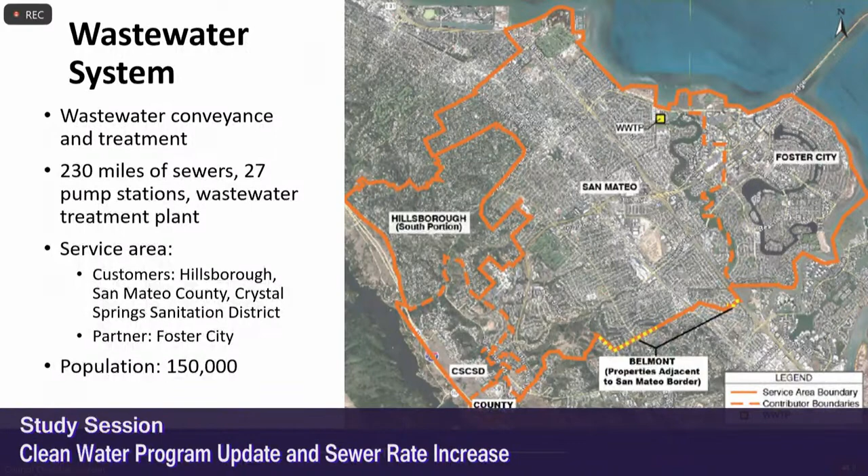As you can see from this figure, we have a pretty extensive wastewater conveyance and treatment system, over 230 miles, many pump stations, and a wastewater treatment plant in the city. Our service area includes customers such as sections of the town of Hillsborough, San Mateo County, and the Crystal Springs Sanitation District. We have a partner, Foster City, who owns a quarter of the treatment plant. All in all, our service area spans over 150,000 residents in the city and in the areas of our customers and partner.

The drivers of the Clean Water Program have been really regulatory. In 2009, we were served with a cease and desist order to address sanitary sewer system overflows. The goals of the program have therefore been to fix our aging infrastructure, add capacity so that we can manage wet weather flows, and meet future regulatory requirements, specifically those associated with nutrients.

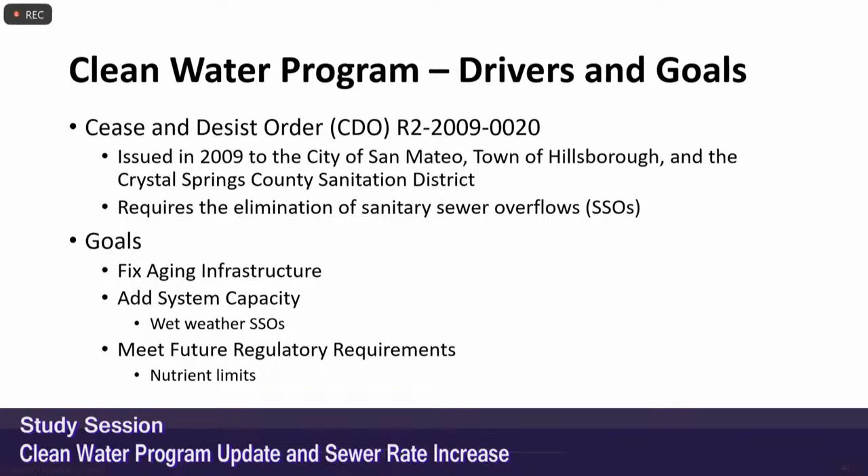This has been a $1 billion, 10-year effort. We're actually in year nine. As you can see from the figure, we have quite a few projects that have added 10 miles of sewers, and we have our expansion at the treatment plant. We anticipate completing the program in fiscal year 2025-26.

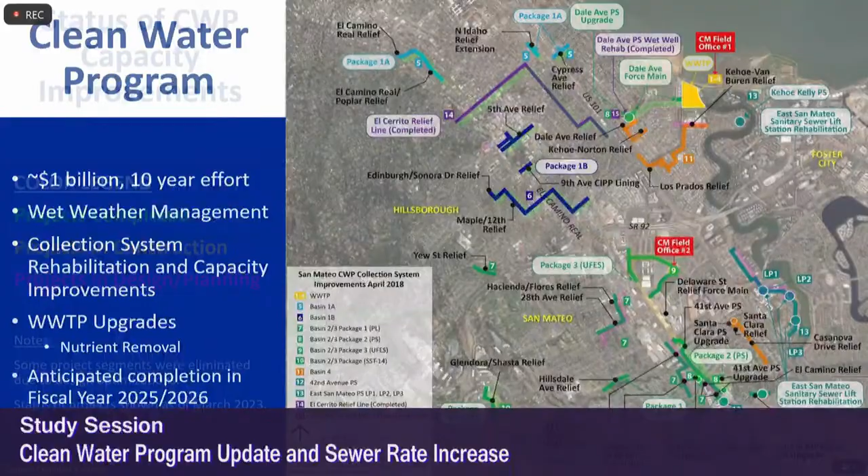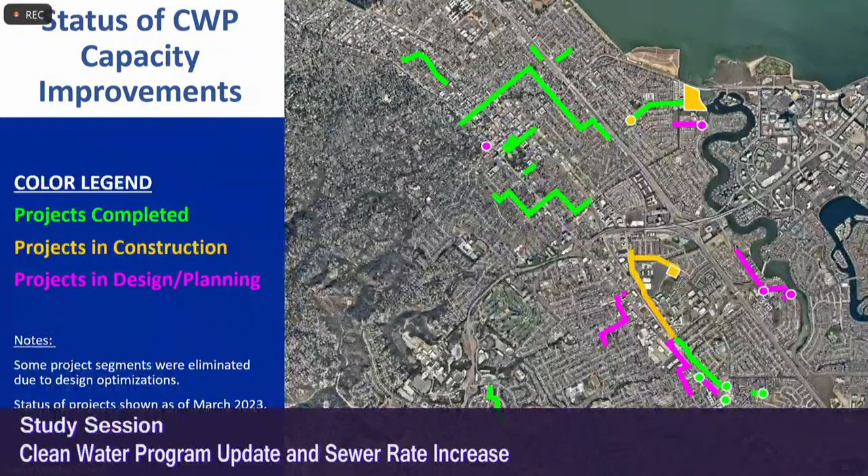Thus far, the projects in green are all those that we have completed. We're currently in construction on Delaware, at UFES, and the treatment plant, and we've got a few remaining projects in design and in the planning phase. We're almost there.

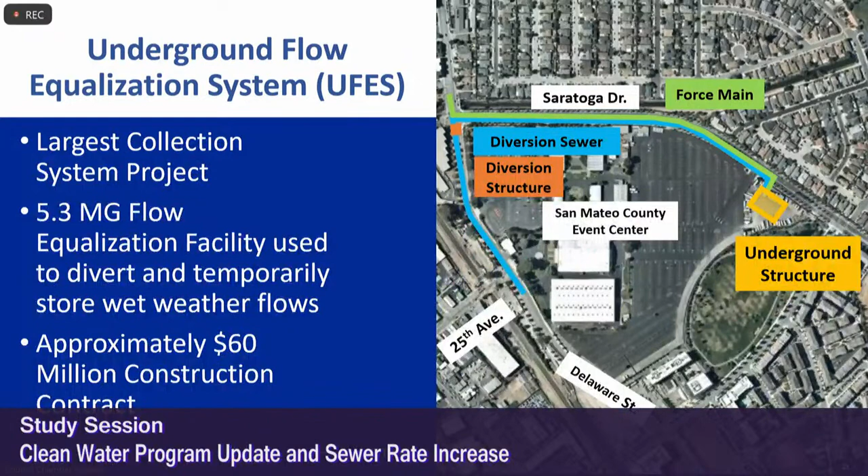Now, you've heard about our underground flow equalization system project. This is our largest project in the collection system. It consists of a 5.3 million gallon tank that will be used during wet weather, and it's cost us approximately $60 million.

We do have existing sanitary sewer overflows throughout the city. There's an area along Delaware where there are constraints and capacity challenges, so that's the area where we see them when it rains. So the location of UFES is pretty critical, and it's being built at the county event center.

The way the system will work is when it rains, our operators at the treatment plant will decide when to divert flows, store that flow, and then when the flows at the treatment plant get low enough, they'll start pumping that water back into the system to be treated at the plant. So they'll have to decide, depending on the size of the storm, when to begin storing and when to pump out.

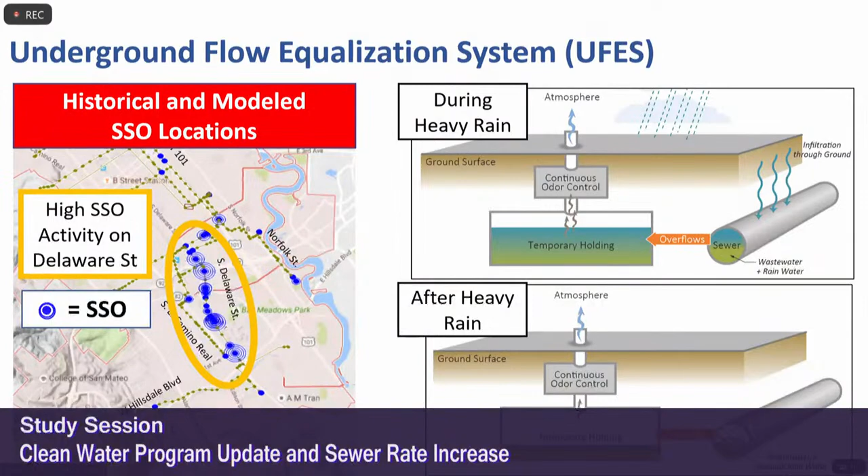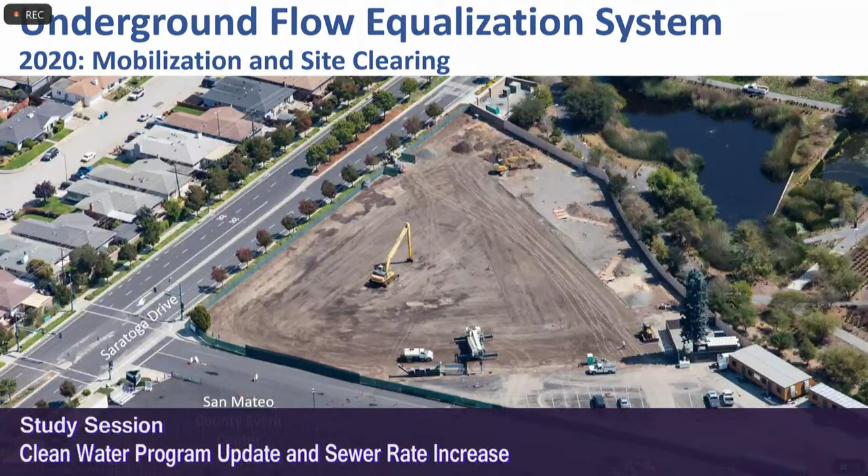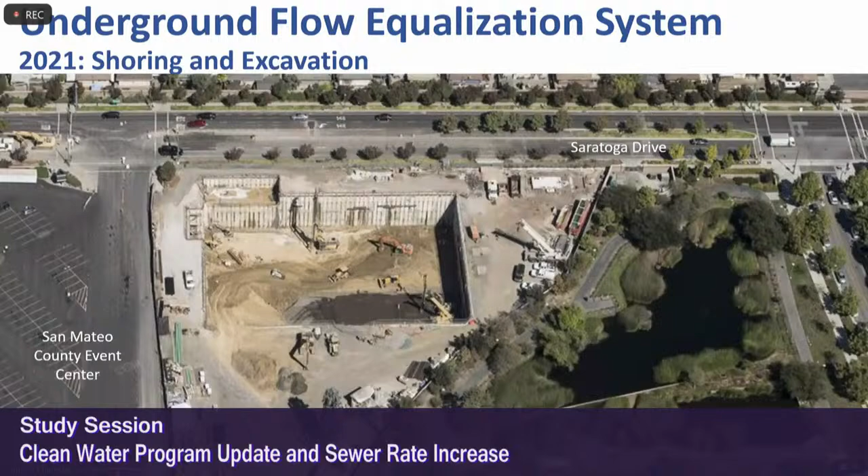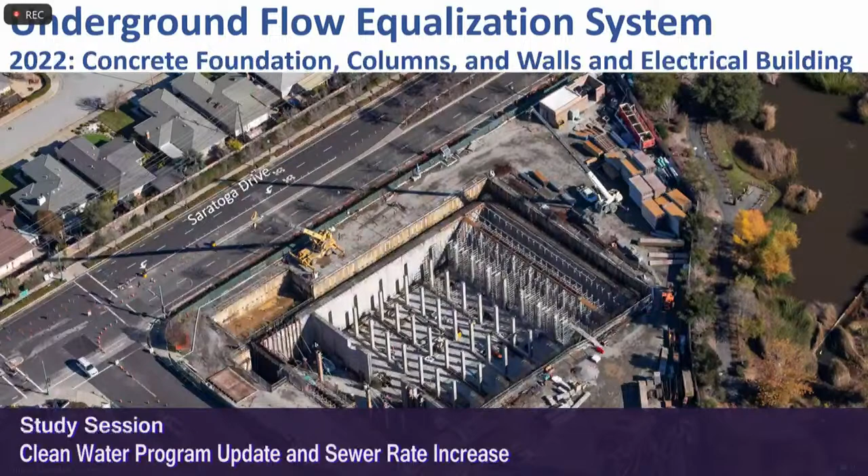So that's UFES. The largest project in the Clean Water Program is the expansion of the treatment plant, and I'll walk you through some really neat pictures.

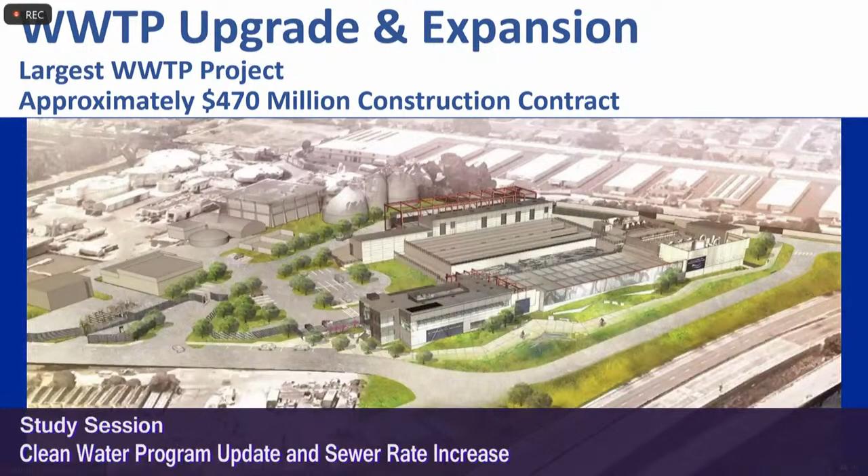The objectives of this project have been to modernize our wastewater facility. We currently don't have a sophisticated system to receive the flow nor to remove nutrients. This project expands the treatment process to include what is now just standard preliminary treatment, and it will enhance our biological nutrient system.

With this project, we will be an early actor. That means there are new requirements to remove nutrients because San Francisco Bay is losing its resiliency, so we will be removing half of the nitrogen currently found in wastewater. For us wastewater folks, that's a big deal.

We will be able to manage 78 million gallons a day, and we will also be ready to meet Title 22, which is effluent that will be ready to be used for recycled water whenever that demand materializes.

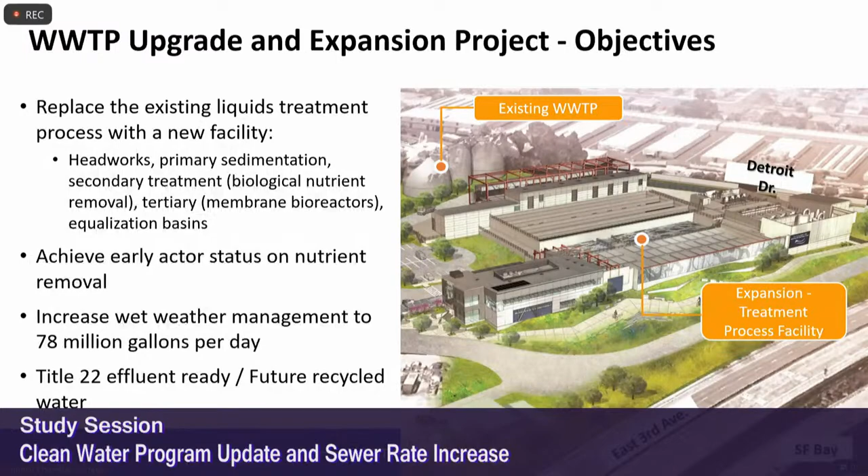We were very fortunate that the city had land right across from the existing facility, so construction has been going on right across the street, and the pipes will come across. There will be some processes on the existing facility that we will abandon, and some that we will reuse for equalization.

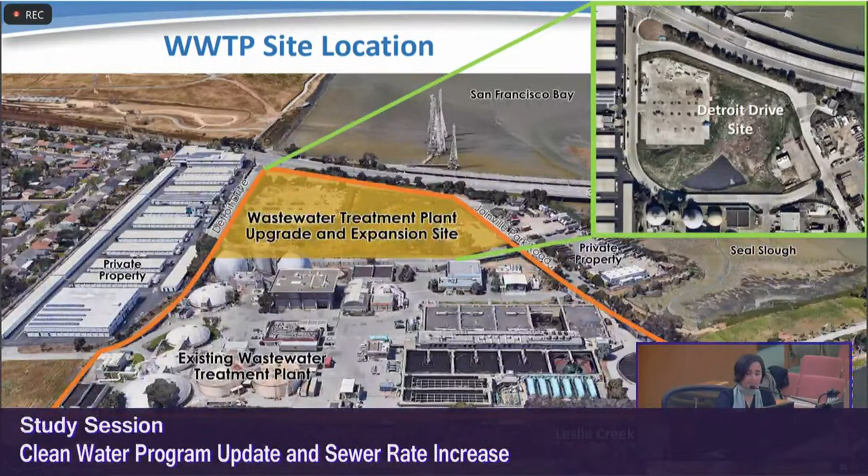This is when we awarded this project in 2019. This is when the site was getting excavated in 2020.

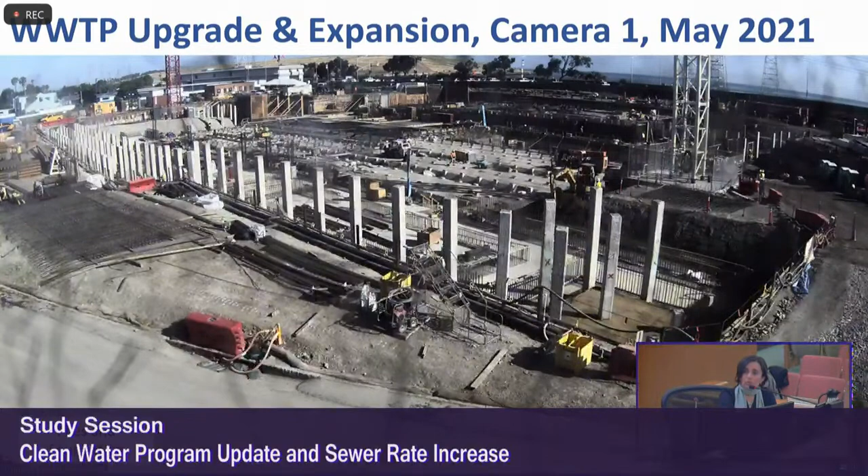This is a picture of the piles. There were over 1,900 piles that were driven 100 feet deep, and we were very fortunate that over that year we were able to manage noise, monitored for vibration, and only received one phone call. We were very grateful to the community for their support during the driving of all these piles.

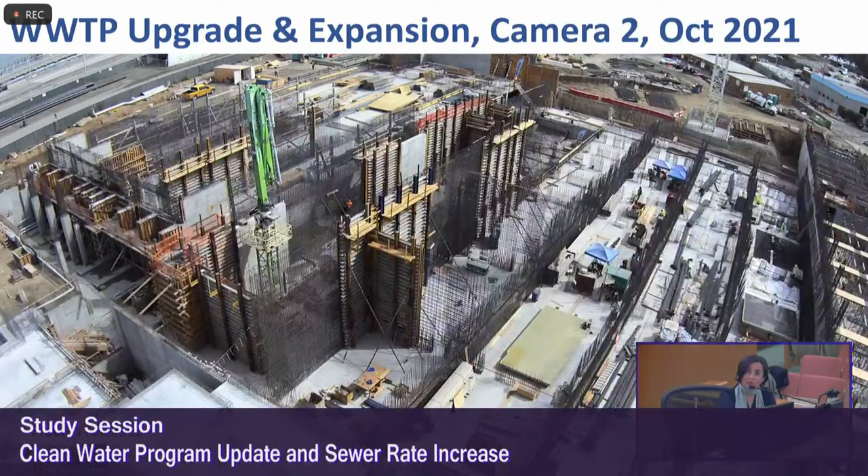This is a picture that shows how deep some of these basins are, and the tons of rebar that have gone in. This is a critical facility, so the structural design is rather complicated. It's also very compact, and a lot of concrete has gone into this.

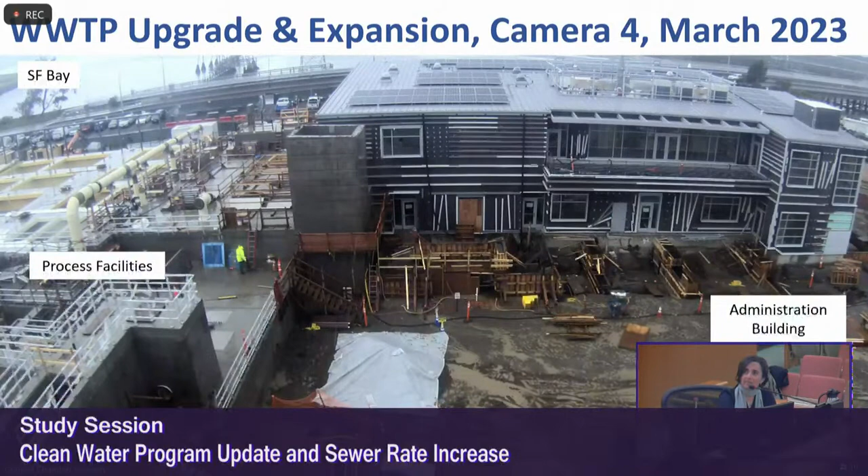The construction has been going really well. And finally, this is a picture of our new administration building, which will be LEED certified, and you can see the solar panels up on the roof.

In terms of schedule, we started this program back in 2015. The construction of the plant started in 2019. Following that, we began building UFES. We anticipate completing UFES in 2023, at the end of this year.

For the plant, we will begin commissioning, so the startup process will be rather challenging. We anticipate starting that process at the beginning of next year, and completing the treatment plant at the end of next year. We will be closing out the project in 2025, and then the whole program in 2026.

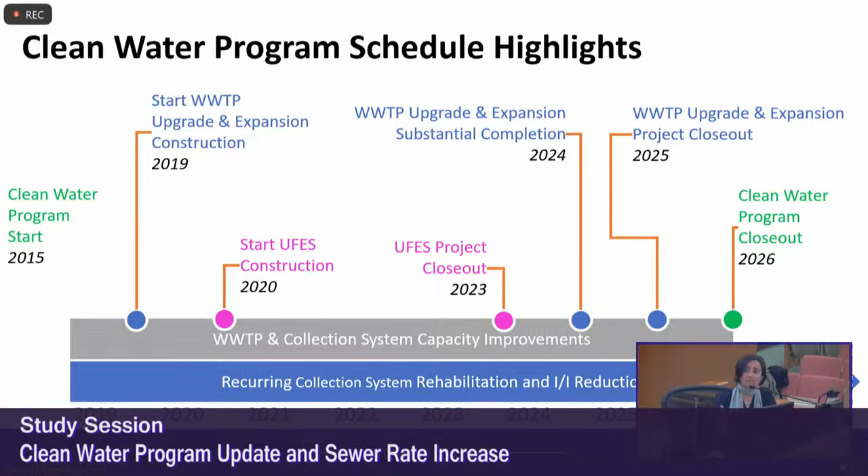Even though the focus is on the Clean Water Program, we have ongoing projects in the collection system. We're constantly rehabilitating our system, inspecting, and doing what we can to reduce water that infiltrates into our aging infrastructure.

In terms of costs, this was back in 2017. The budget established for the program was almost $1 billion, so 991. We are tracking well. We've made some decisions to weigh out some of the projects that had been planned, and we eliminated some of those, so we are tracking below the 991.

However, the treatment plant project is right now over budget, and that has to do with challenges we had with utilities, expanding and paying for the design and construction of the drinking water and fire water lines from Cal Water, and coordination with PG&E. The site is very busy, so we've encountered a lot of underground conflicts. We are doing a lot more building inspections and special inspections given the complexity of this project. There's also added scope to meet recycled water criteria, and concrete repairs that we've found as a result of continuing to use parts of the existing site.

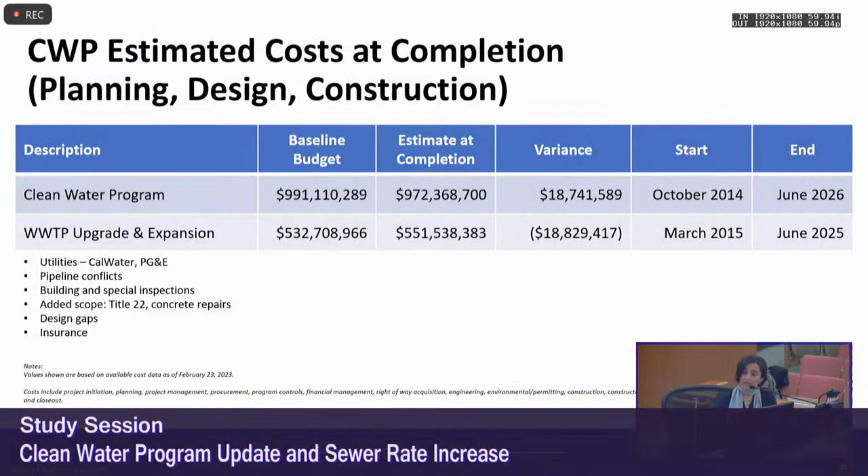Tracking below budget.

In terms of our sewer rates and future needs, there are increased utility costs that we will see. The treatment plant itself will use more electricity and more chemicals, so our operating costs will go up.

We are hoping to save for the repair and replacement of the facility. This is a membrane facility, and replacing those membranes will be expensive, so we need to make sure those funds are in place so we can make those replacements.

We've been very fortunate to receive council approval to add maintenance staff. Our maintenance staff was a very small group, and with the instrumentation and added processes, we needed more positions. Those were approved, and we've been in the process of recruiting and onboarding.

And there will also be just more regulatory compliance as it relates to meeting our nutrient requirements.

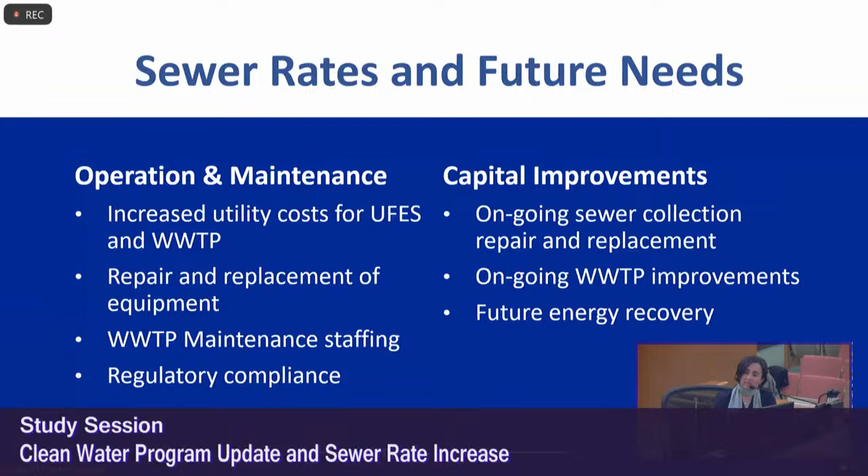In terms of capital improvements, there will be forever ongoing sewer collection repairs and replacements, ongoing treatment plant improvements, and also we are right now scoping a project to capture the gas that we produce with the digester so that we can produce electricity. That is in the evaluation phase, and we'll see what kind of capital project materializes so that we put that methane to good use.

And with that, I will pass it on to Alex from Bartle Wells.

Okay, thanks, Azalea. Can folks hear me? Okay, just want to make sure.

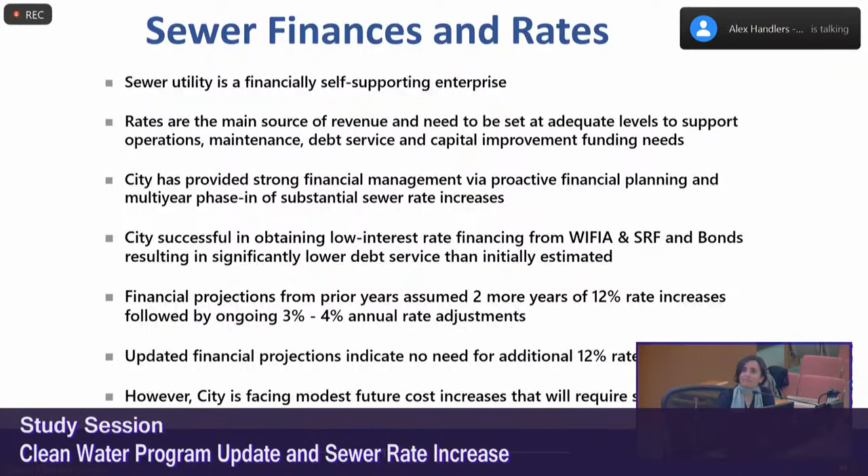Well, anyway, congratulations to the city on the project. And what I'm going to talk about is the sewer finances and the rates.

It's been a while since we've spoken with the city, so I kind of wanted to start with a brief refresher, and that is that your sewer enterprise is financially self-supporting. So it's the customers who are paying for the cost of service.

Sorry, rates are— Alex, to interrupt you, we're going to need to take a quick break.

Your rates have to be set at levels to support the cost of service.

And when we look back at what the city's done over the last 5 to 10 years, a lot of good proactive financial management, planning for these rate increases and implementing them. You've phased in some pretty substantial increases, but you've done it gradually over a number of years, which is good practice from my perspective. And also you've been very successful in getting very low interest rate loans.

Both from the WIFIA, the Water Infrastructure Finance and Innovation Act funding program, and from the State Revolving Fund Loan, or the SRF program, and some bonds. So the good news is, even though the project is quite expensive, the debt service is coming in significantly lower than was projected just a handful of years ago.

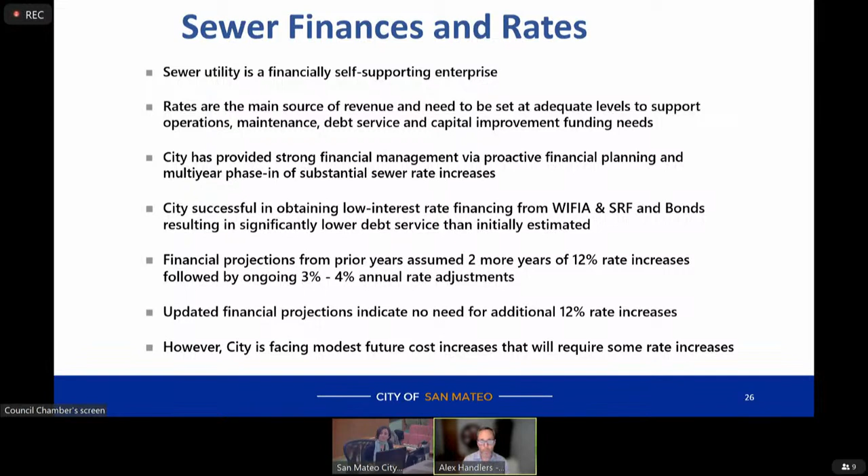So when I look back at those prior financial projections from 2017, it looked like the city would need 2 more years of 12% rate increases. But the good news is, because of the success in getting this low rate financing and keeping the project below budget, the rates don't need to go up as much as previously projected.

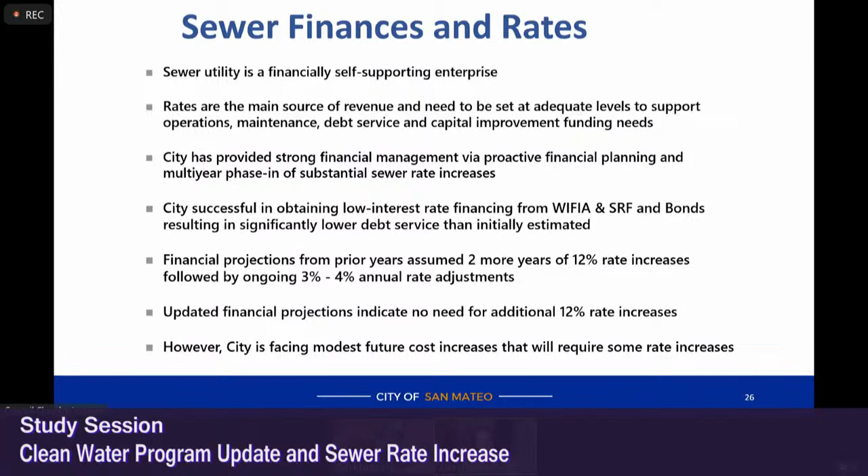And in fact, you've already done the heavy lifting. So what we're looking at in the future is more kind of smaller inflationary increases, because you are facing some modest increases. And on the next slide, it just highlights what I'm calling modest financial headwinds.

So there are smaller increases needed each year. As Azalea mentioned, this new treatment plant does a lot more than the existing facility. There's higher costs for electricity, chemicals, membrane, staffing, you name it. So those costs are going to be phasing in as the plant comes online.

In addition, even though you did get very low interest rate financing for a lot of this project, the debt service isn't fully online yet—some of it phases in. So you've got to pay that debt service and also meet some standard financial covenants associated with debt service.

And also make sure there's enough funding in future years for addressing the needs of the city's own collection system. You've got a lot of old pipelines, just like many Bay Area agencies. A lot of them were put in 50, 60, 70, 80 years ago, and there's going to be a need to replace those lines as they hit the end of their useful lives.

And on top of all this, small increases are typically needed just to keep up with cost inflation. So this slide here shows kind of a long-term history of the sewer rates. You can see in the early 90s, there was minimal rate increases. Starting in the 2000s, rates started to be phased in gradually year after year.

And then you got hit with the drought, like many agencies, from 2013 to 2016. There was a big decline in billed usage. So even though the city had adopted rate increases, the revenues weren't increasing very much at all, because they were being offset by a decline in use. So the city had to do a catch-up rate increase in fiscal year ending 2018, and then phased in the last 5 years of rate increases to get where you are today.

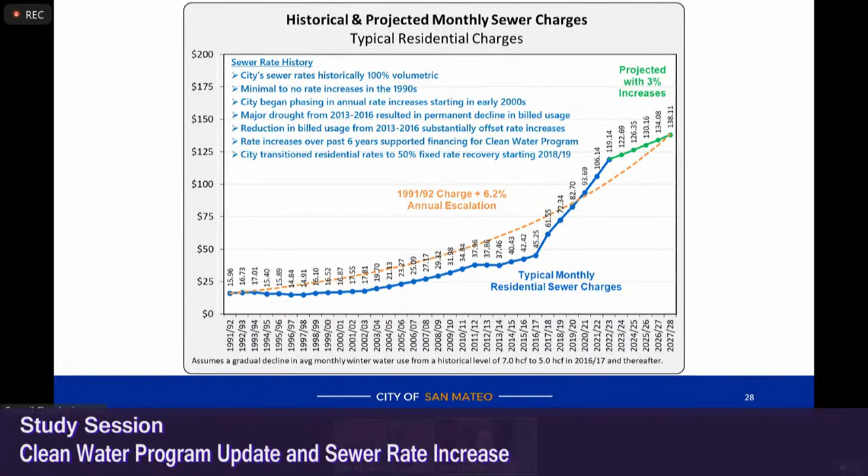I'm saying maximum sewer rate increases because there are still some unknowns out there, even though the best financial planning has been put together to try to estimate what this new treatment plant is going to cost to operate. There's some unknowns regarding that. And also, no one ever really knows what the billed wastewater usage is going to be, because that can fluctuate from year to year. In recent years, it's come down.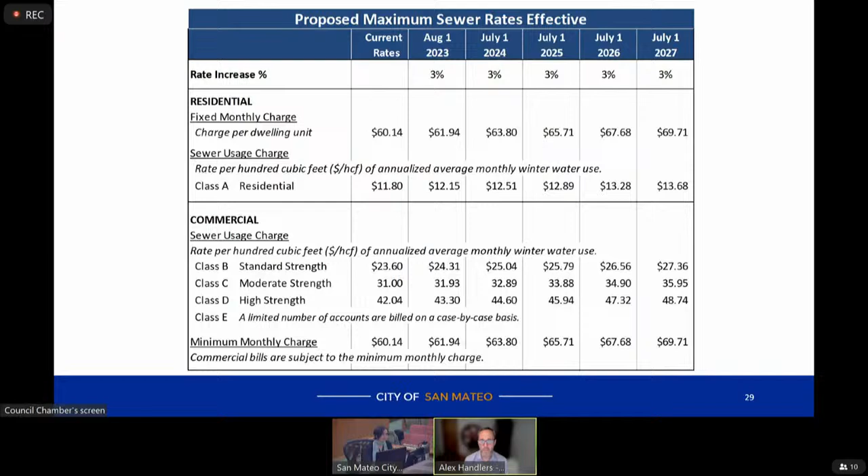So what's being proposed is getting authorization through the Prop 218 process for rates that equate to up to 3% annual rate increases for each of the next 5 years, with the understanding that the city will be able to evaluate each year once you get the water use data. The hope is that slightly lower rate increases can be implemented.

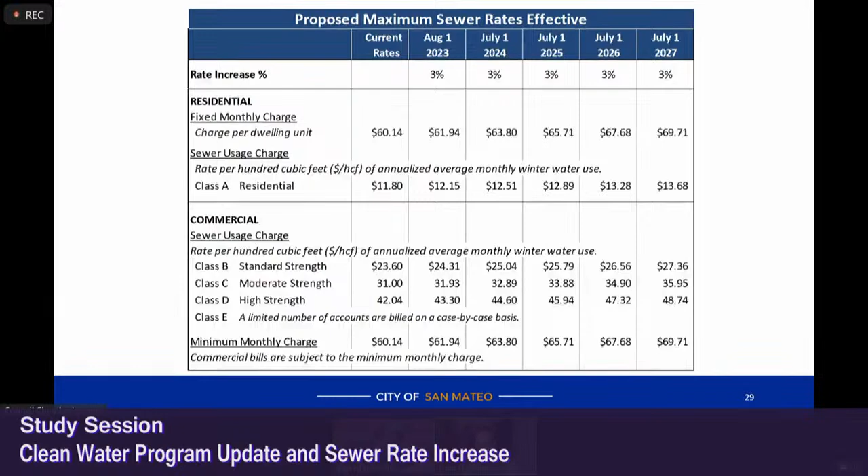For example, if you look out to the last year, it shows your residential charges have a fixed charge and a volumetric charge. So we're showing a maximum fixed charge of $69.71 if all this was put into place as projected. But if you go out 5 years and it turns out you're able to get by with something less, maybe you only need to implement a $68 fixed charge, and proportionately lower rates for the other usage categories as well.

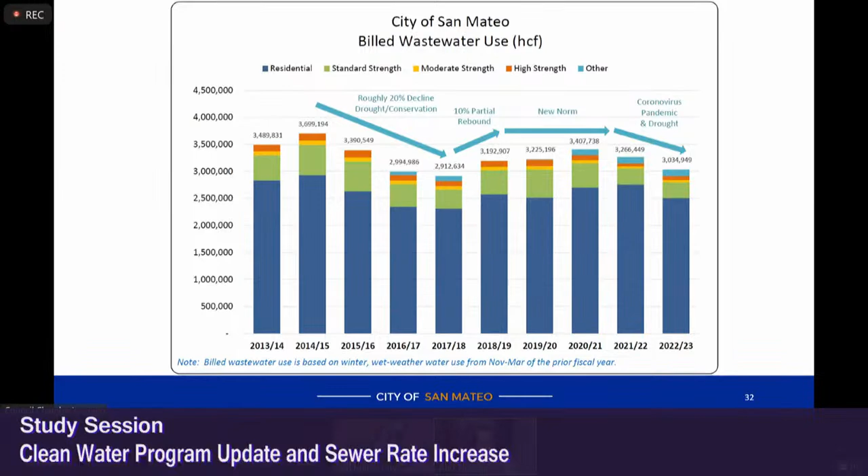But in recent years with drought, and I don't know if the coronavirus pandemic plays into that as well, the usage has actually come down a little bit, so it's kind of now at a lower level. We expect it'll bump up a little bit, but it might not. That just shows you the history of the usage. This slide here shows a graph of your clean water program expenses, broken out by agency.

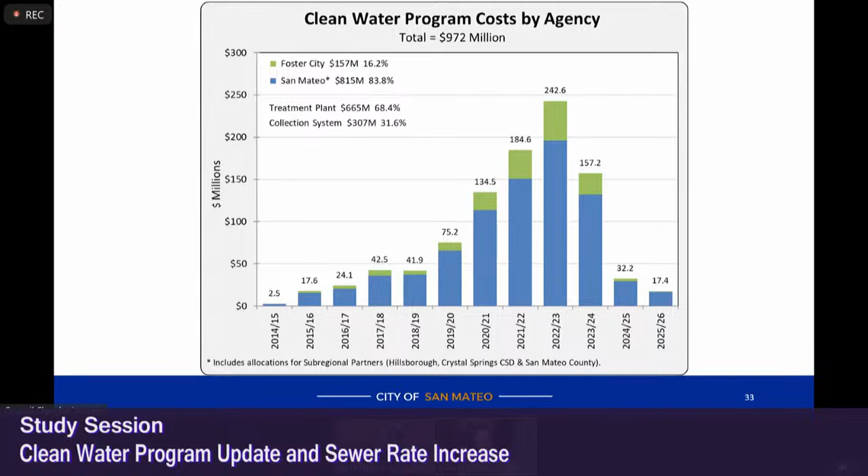On the next slide, the good news is that the city, San Mateo and Foster City aggressively went after low interest rate financing, and were very successful in getting loans from WIFIA and State Revolving Fund loan programs. So all in all, about almost $500 million of this program is being financed at extremely low interest rates. The WIFIA rates are a little over 1.3% for over 30-year financing, and the State Revolving Fund loan is only at 0.8%, less than 1%.

You also had to supplement that with some bond issuances, but even those bonds were issued in a much more favorable interest rate environment. So the good news is this is all locked in. You've already locked in all this funding. The all-in average interest rate is less than 2%, so it's even lower than inflation. Congratulations to the city on this. This is a huge achievement from my mind on the finance side.

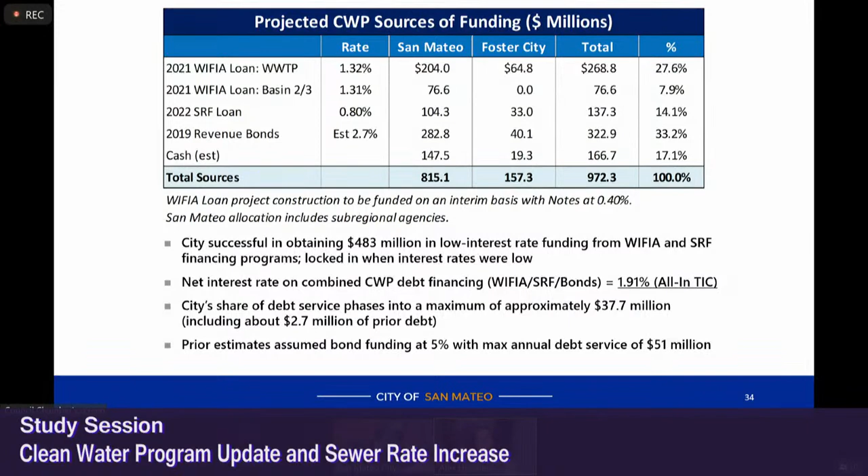When we look back and see what we anticipated the debt service was going to be, we thought your maximum debt service would be going up to about $50 million per year. But with this low rate financing, it's going up to only about $38 million a year, which is the reason why the rates don't need to keep going up. So good news there. This slide shows graphically the debt service.

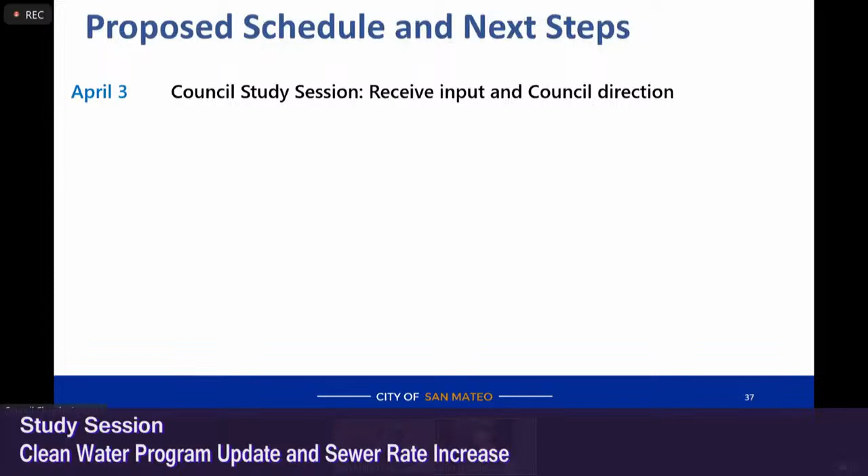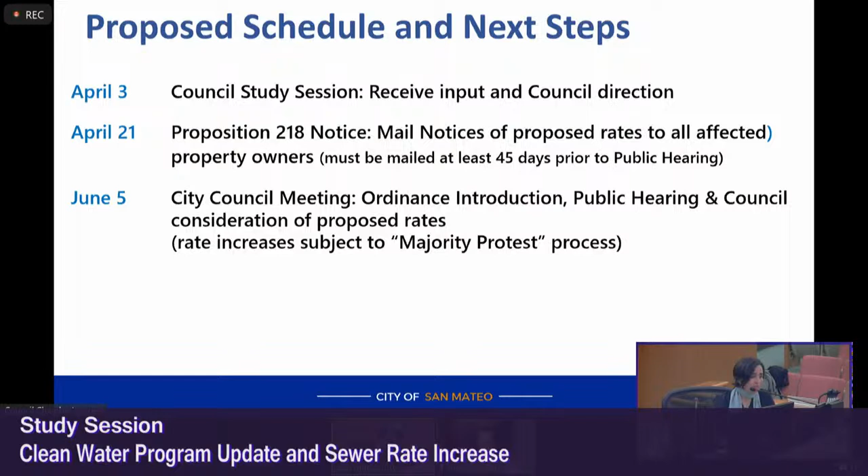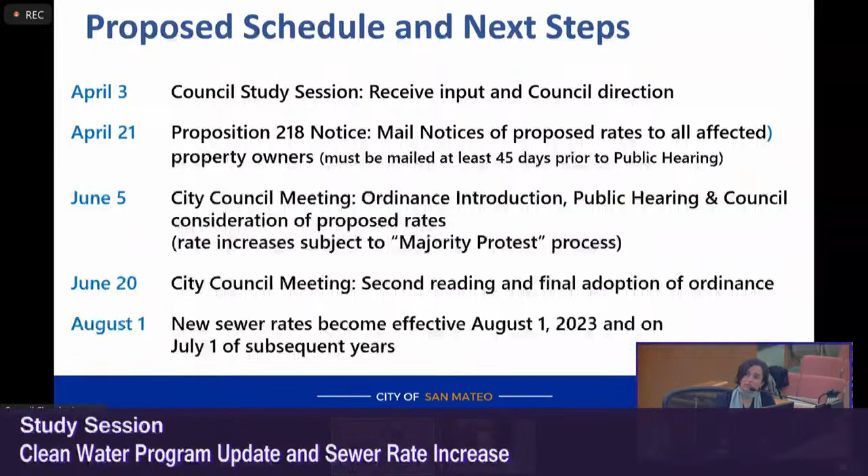Thank you, Alex. So we are here tonight to seek your feedback and direction on the proposed rate increases. On April 21st, depending on your feedback, we would mail the Prop 218 notices with the proposed rates, then come back for the ordinance introduction, public hearing, and council consideration. On June 20th, we would have the second reading and final adoption. Then the new rates would become effective August 1st, and on July 1st in subsequent years.

So we thank you and seek your feedback as it relates to the proposed maximum of 3% and also the 5-year plan.

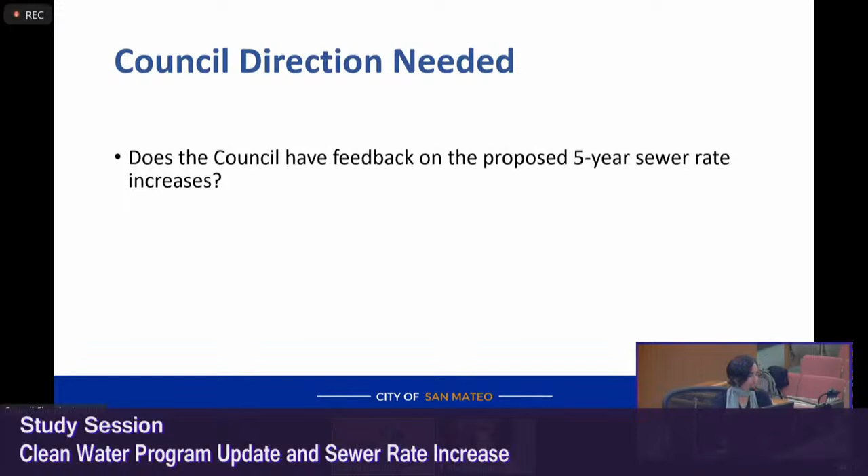Thank you so much, Azalea. So this is the time where we ask questions. This is council questions time, and you might not know that Azalea is a water engineer, so she would be happy to answer any questions on the topic. This is one of her favorite topics. After that, we'll move on to public comment, and finally, we will have a direction from council. So this is the time for questions. Councilmember Hedges. Yes, thank you.

Alex, could you go back to, I think it was the last slide we did?

That one. So I'm looking at that number across the green, and it seems to me that's debt service? You're correct. That's the debt service, and right now it's about 17.8 million, but it bumps up. There's a temporary period for a couple of years where it's a little bit higher, corresponding to when you're paying off those wastewater system notes, which are just a one-time thing before it gets replaced with the long-term debt from the bonds, the SRF, and WIFIA.

Yeah, it seems like it's pretty steep in 2030, 31, 32. Okay, thank you. Yeah, and there is a prior slide that shows how the debt is phasing in that might be helpful to see also.

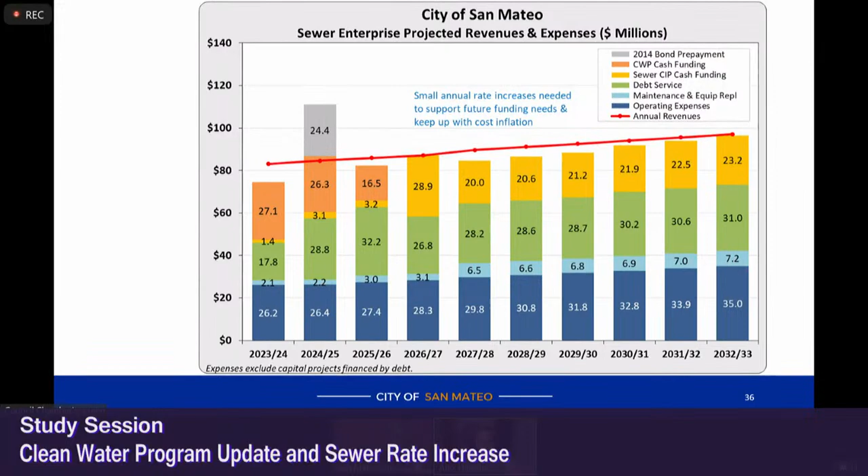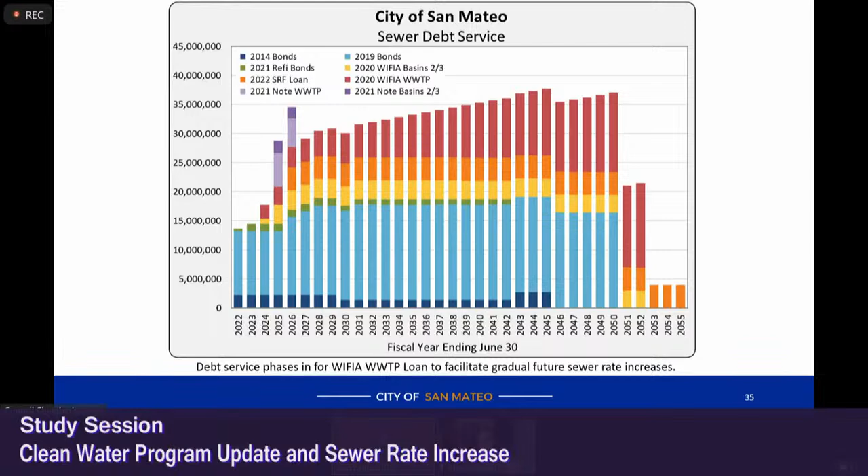Thank you very much to both of you for the presentation. I'm interested in what seems to be a risk that is also a reward, as Californians hopefully continue to conserve and use less and less water. That actually becomes more and more of a threat to the rates. So I'd appreciate your thinking on that topic.

I am pulling up one of the things Alex noted about what is fixed versus volumetric. Obviously with conservation, the volumetric piece becomes much more challenging in terms of the projected revenues that will come in. I think that's why it's important to reevaluate our water usage, since wastewater rates are based on water consumption every year. But Alex, you do have some suggestions for us to consider in the future, if you look at this graph in terms of what other agencies are doing to stabilize rates.

Yeah, this was a big part of the prior rate increase process, because before the rates, going back more than 5 or 6 years ago, the rates were 100% volumetric. So the city moved to kind of a hybrid 50-50 approach. It helped a lot with revenue stability, but you're bringing up a very good point. Water use has come down in California over the last 20 years, over the last few years.

Some of it in recent years may be due to the buildup of one of the worst droughts on record, before we had this huge amount of rain, record-setting rain and snowpack this past year. This is something the city's going to need to monitor — in reality, no one knows what future water use is going to be. There's been a lot of good efforts already to deal with the low-hanging fruit of conservation, so people have gotten their water use down quite a bit over the last decade.

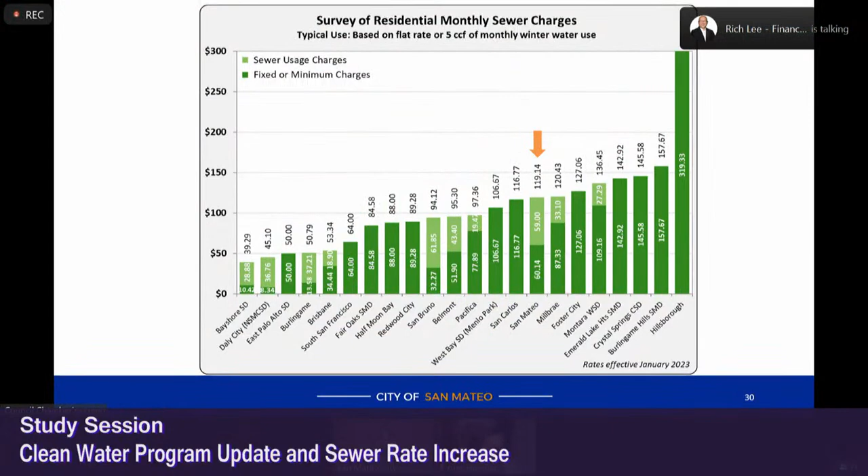Mayor Lee, this is Rich, I can answer that question if you'd like. Great, hi Rich. So the answer is it's approximately $170 million that the city has saved ratepayers because of the issuance of low interest loans. That's wonderful, thank you so much. I don't want to leave that unsaid as we discuss this publicly.

Help remind me, is our average gallon per day 60 million gallons treated per day? Our plant sees around 9 to 10 million gallons a day. Okay, so 60 million is like a very large scale wet weather event. Right, that's the maximum capacity of our outfall, 60. And so if we're increasing our capacity to 98 million gallons, that's an increase in our maximum capacity.

So with UFES, the design storm, we have to design these systems to a storm that will generate 98 million gallons a day. We will be able to store 20 by using UFES. We have equalization of 18 at the plant, so we'll be able to store so that we can treat 60, because that is our capacity. All in all, we'll be able to process 98 million gallons a day.

That's really important information for the public to hear, because as we experience more extreme weather events, knowing that we'll have a much more significant capacity for treatment is really a testament to the success of this project. And what that means is that we'll have fewer sewer overflows into the bay and a cleaner ecosystem. So if people weren't catching on to what SSO means, sometimes we throw around our acronyms - it's sanitary sewer overflow.

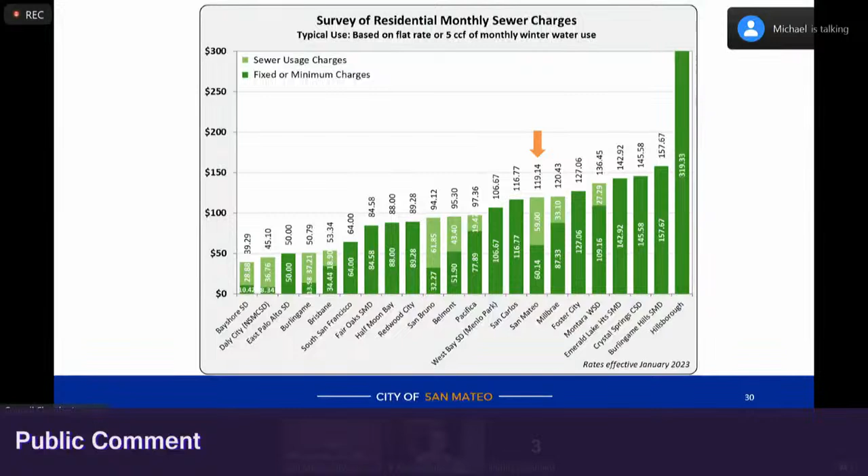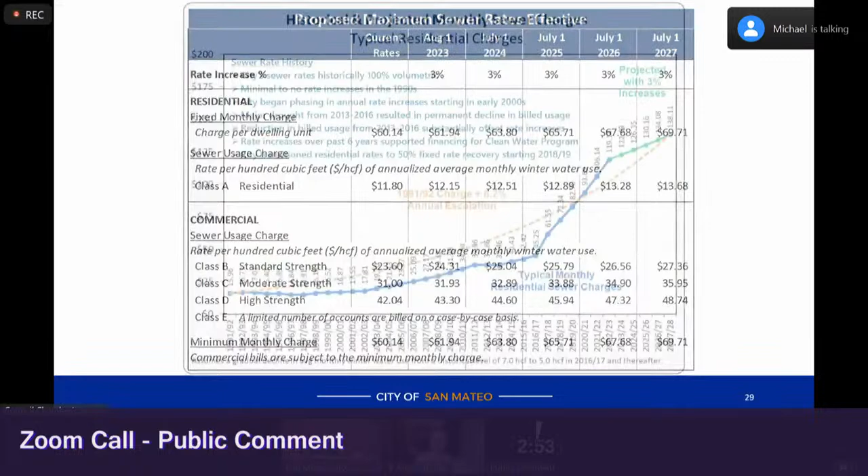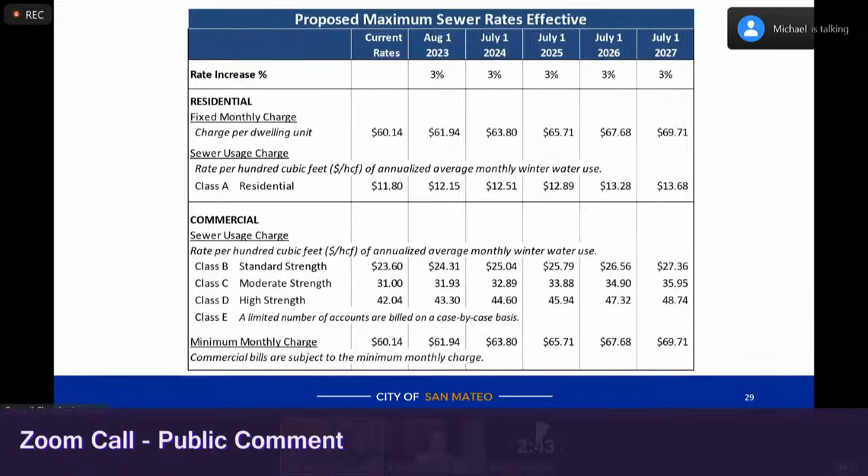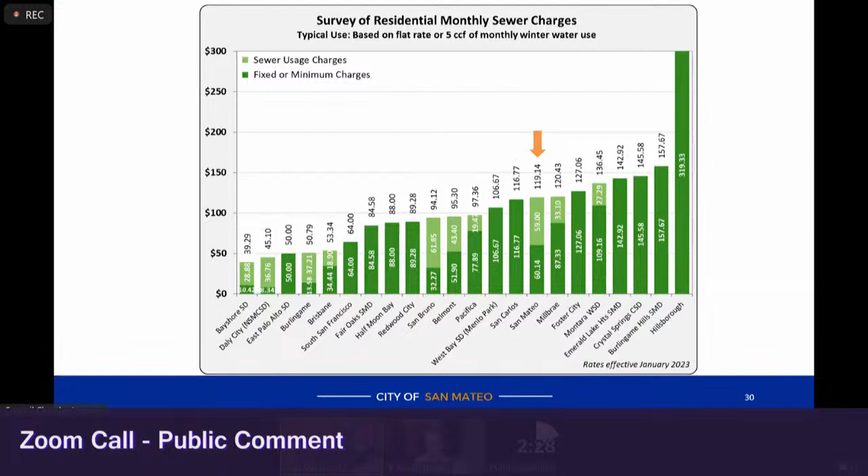Yes, thank you. On your slide 30, which has the total cost of both usage and fixed costs, what is it that the cities of Burlingame and Brisbane are doing such that their rates are less than half of San Mateo's rates? So I can answer that for now. Because these rates, as Alex noted, include the increasing operating costs as well as the debt service, we have invested $1 billion and no one else has. But even with that level of investment, our rates are, as you can see, not on the high end. So when the other municipalities have to then finance their improvements, their rates will increase.

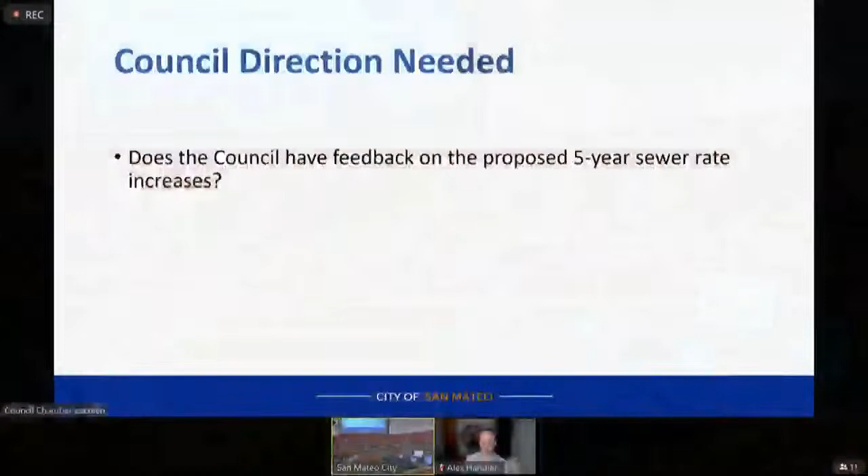I applaud the city's effort and previous leadership who helped get us as far as we are. And I wanted to make a plug for all the community members who might not have gone out to visit the wastewater treatment plant. They're always looking for cards and food gifts, and the original building is still standing, and there's an inscription on it that reads 'Sanitation is civilization,' and I think it still rings very true. So I'm grateful for the presentation.

I absolutely support the 5-year plan. I appreciate the Deputy Mayor's comments about keeping an eye on the rates as they may fluctuate with hopefully some reduced water consumption as the years go by. And I also concur with Councilmember Newsom's support, and I think many of us share the goal of moving towards a recycled water plan. I think it would be helpful to hear any updates on that when we're ready to share. That's something I think is of very strong interest to the community.